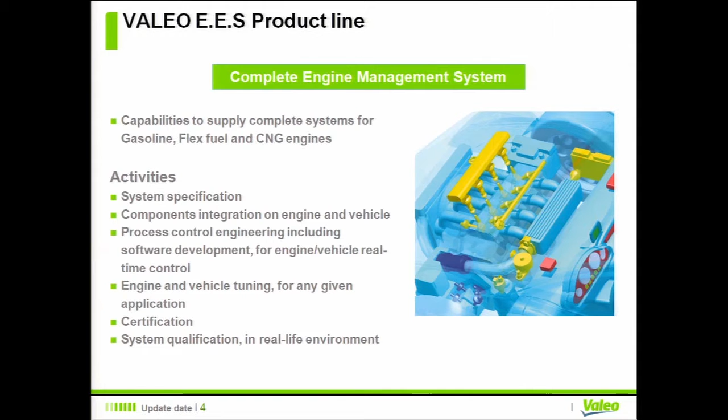Then I will describe the development process by itself. And as a conclusion, I will talk about benefits, issues, and improvements that we still have to do. So development context. So first, Valeo engine management system. We developed full engine management system, but also components and also software components, previously as standard software and now as AUTOSAR components. So today we'll for sure focus on software activities development, including control law development and implementation.

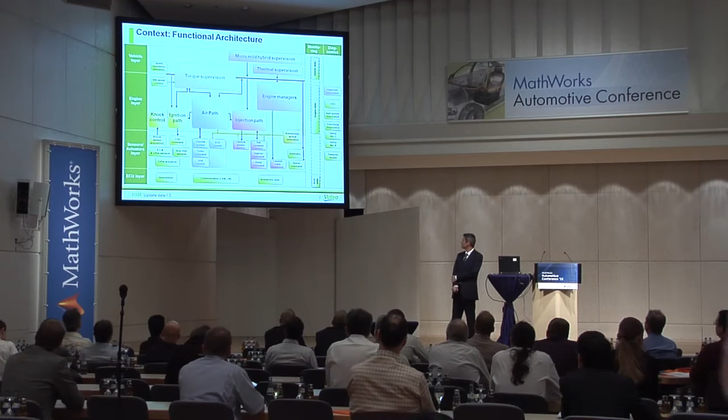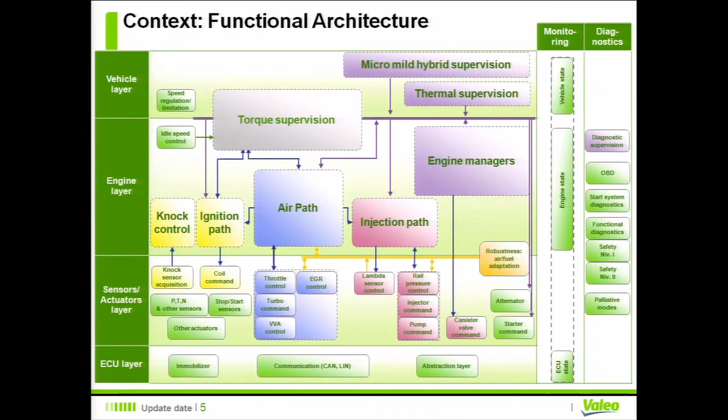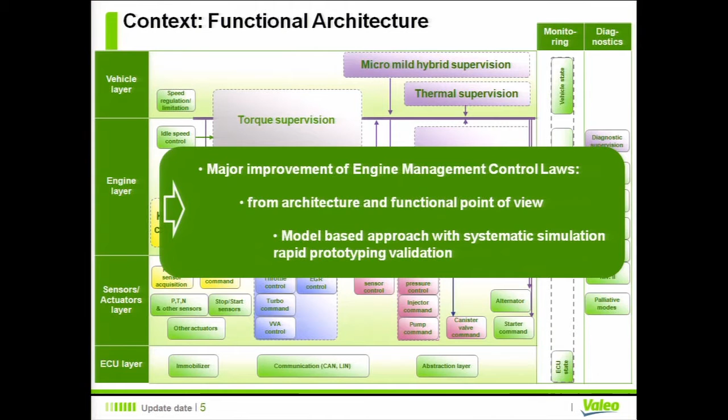So the first element was a main improvement done on our functional architecture system. And due to functional requirements such as hybridation, downsizing, and so on, we had many architectural, functional, and also performance improvements to do on our system. We are used to work with model-based since many years, like everybody for sure. And in this context, we also introduced latest model-based processes. I mean, we introduced systematic simulation. We used to do simulation like everybody, but during this improvement, systematic simulation was done on all our systems. And rapid prototyping was used as validation of new functions. Okay.

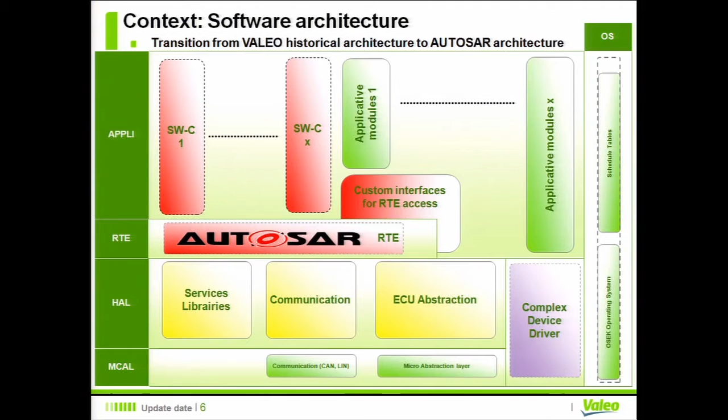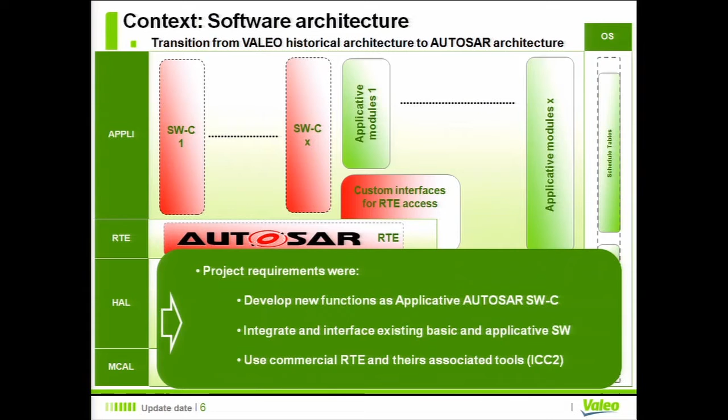The second point is the AUTOSAR context. We had to develop those new functionalities as applicative software components, just because it was a customer requirement. And due to these constraints, it was very difficult for us to reuse existing software, so we had to start from scratch, and to integrate those new software components in an existing software, so mixing old architecture with AUTOSAR architecture. The last constraint that we had was an organizational request who wanted to be able to switch from AUTOSAR architecture to standard architecture. And due to all those constraints, we chose to start with automatic generation of code at this time.

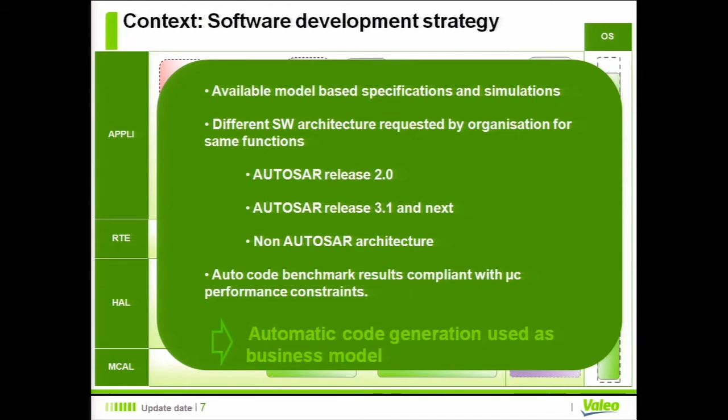Okay. So the development process by itself, I will first talk about functional design. Models that are developed are used during simulation, during co-simulation, and are then used with rapid prototyping to be validated on test benches. Functional requirements are introduced in the models and in the test environment, oracles and stimuli. And functional requirements are expressed as signal builder behaviors, and they are delivered as a standard element of specification.

So with this process, algorithms are robust due to validation, and all what is requested by software teams is delivered at the output of this step. I mean, we've got the model okay for the automatic generation of code, but we have also simulation and stimuli sets that we will use during all the process to test non-regression of the implementation.

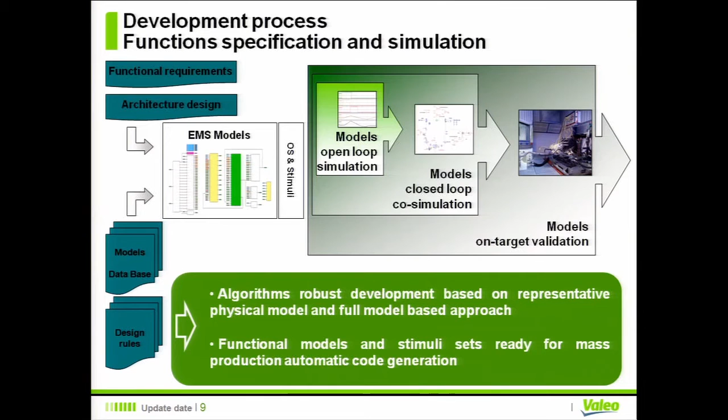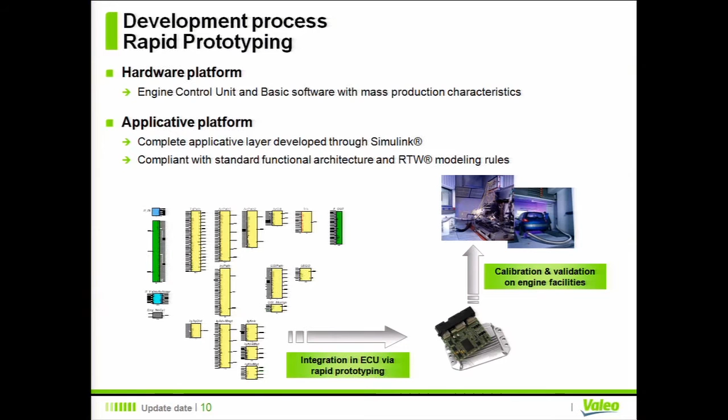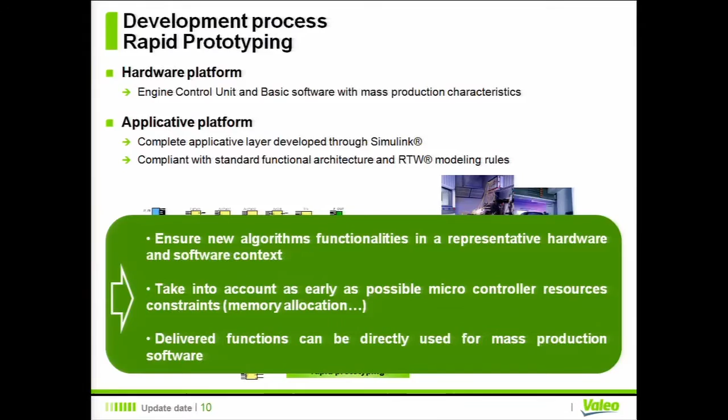So for the rapid prototyping, one important point is that we use a rapid prototyping platform based on the final microcontroller. It embeds more flash and more RAM, but the CPU is the same and the hardware definition is the same. So we've got something very representative of the final ECU. And the designer also used Real-Time Workshop to embed their new strategy in rapid prototyping. So at the end of this step, we've got information about microcontroller resources consumption. And we know also that models can be coded with Real-Time Workshop.

So for the software team, the output of the design phase is what we were expecting for many years. I mean, we've got models that are executable, and we also have expected behavior description provided by the simulation. As a complement, we also have information on microcontroller resources consumption.

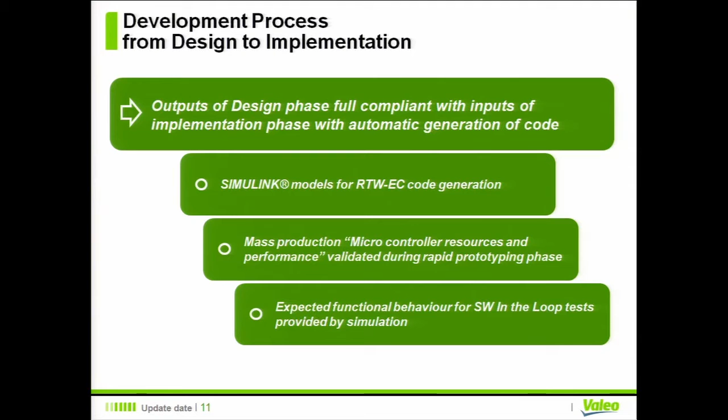Okay, so at this point, we can start with a real implementation process. The implementation process is divided in 4 steps. The first one is the one we call architecture. We've got to make some reworks on the design models for many reasons.

We've got to introduce specific software requirements in the models. We've got to introduce our software optimized libraries in the model. What else? We've got to introduce also basic software APIs in the models, and so on.

So, previously to this first phase, to this first step, one software control is done on the model to be sure that the implementation step could be launched in a good way. And for this, we make complexity analysis. So part of the analysis is done by tools to count blocks, IOs, and so on, and also manual human analysis to check for function call organization mostly.

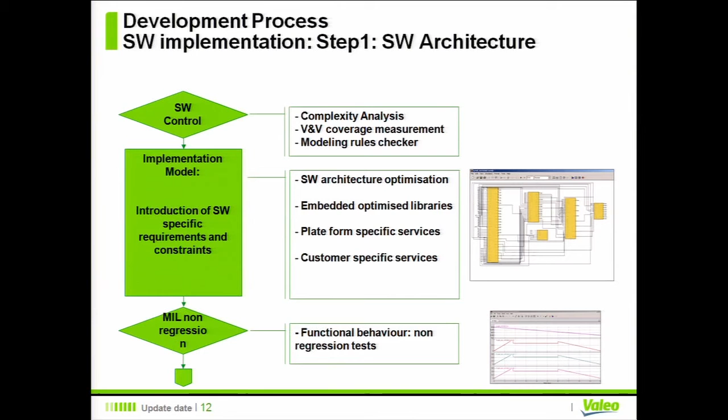And due to the fact that we make some reworks on the model, we've got a first non-regression test at the end of this step to be sure that the model still has the same behavior as the initial one. Okay.

The next step is a real software implementation step. At this step, we introduce all software features like data typing, memory mapping. We manage data type propagation, saturation, overflows, and so on. And at this step, we also introduce AUTOSAR features in the model. All of this activity is done with Simulink and Real-Time Workshop Embedded Coder.

For AUTOSAR workflow, when the AUTOSAR target is selected for Real-Time Workshop Embedded Coder, we've got an interface to describe all the AUTOSAR features for inputs, outputs, and runnables. Okay.

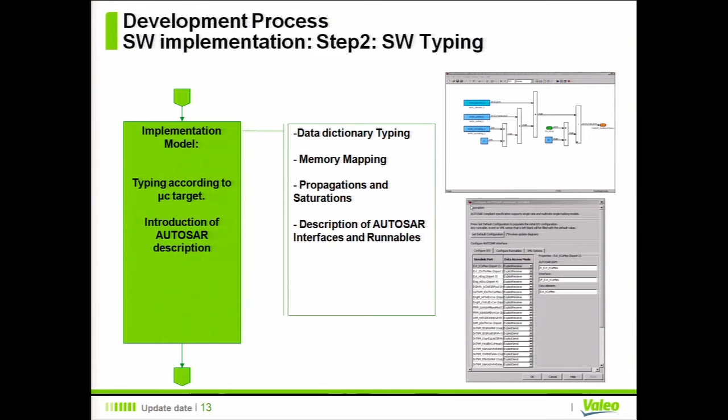At the end of this definition, we run a second time our model checker, but we use much more restrictive rules to check implementation and software rules. I mean, this checker allows us to check for saturation and so on. It's, from my point of view, quite impossible to check a model and model configuration in a human way. There are too many checks to do, too much information to be validated.

So once the model is checked and all the rules are validated or justified if they are not respected, we generate the embedded code as well as the S-function by using Embedded Coder. And the software model and the software code are then tested using SIL process.

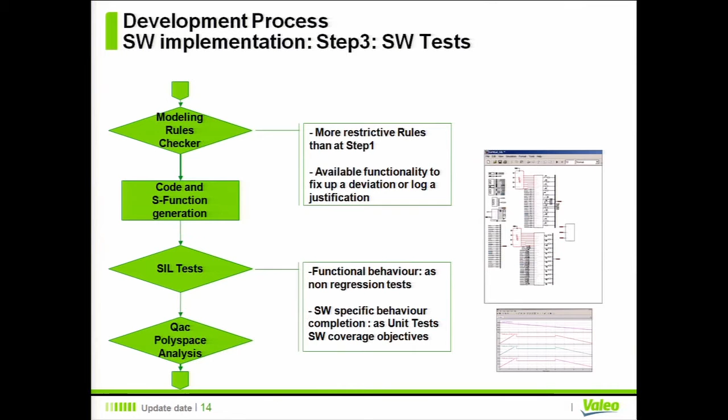Okay. As a complement, we run QAC and Polyspace analysis, mostly to check for overflow management and runtime errors. The last step is software delivery, and still with Embedded Coder, we are able to deliver a consistent package, including the C code, the A2L files, and also the ARXML files.

We also reuse one more time the simulation to extract integration information to build our integration test plans. We use the simulation one more time to describe expected values for a given input set.

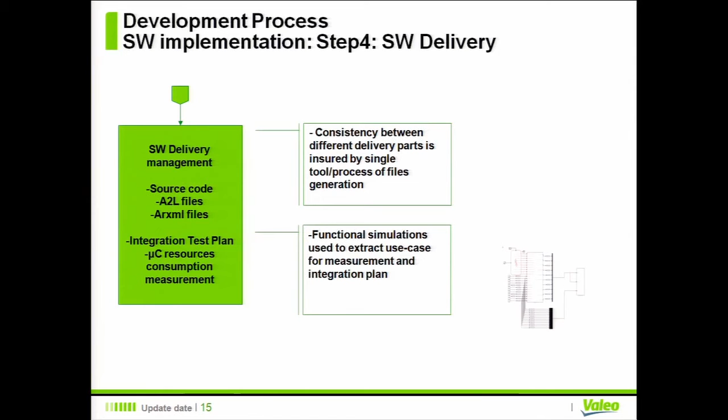So, one also very important point is that we wanted to deploy these new coding processes, but we wanted to keep all the support processes that we had for project management, for requirement management, issue management, configuration management. It was very important for us to keep all those tools and processes as we had before.

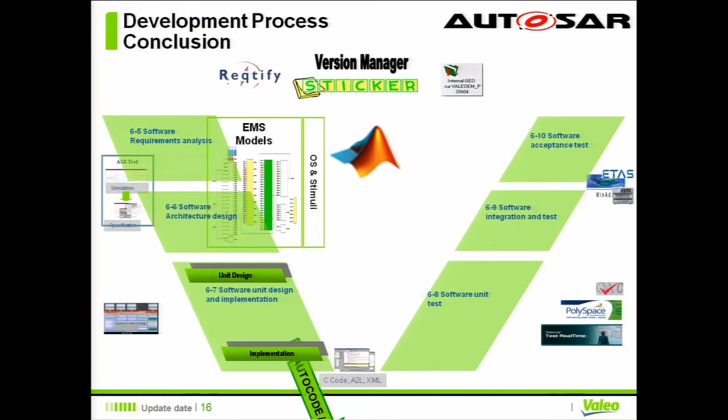And so we just started with the models and the simulation to generate the code and to make verification using MIL, to make verification using SIL, and to reuse one more time simulation to build our integration test plans.

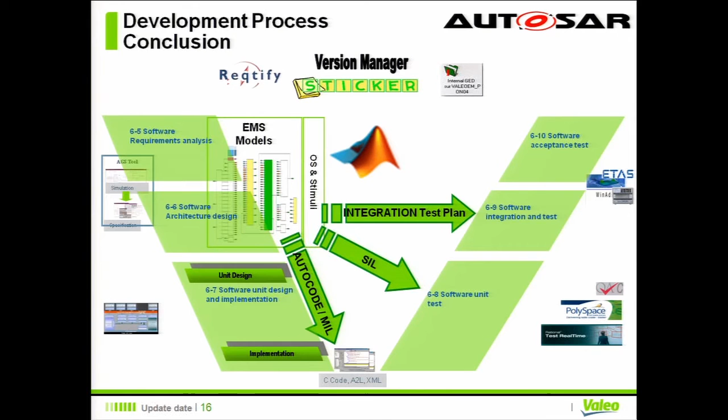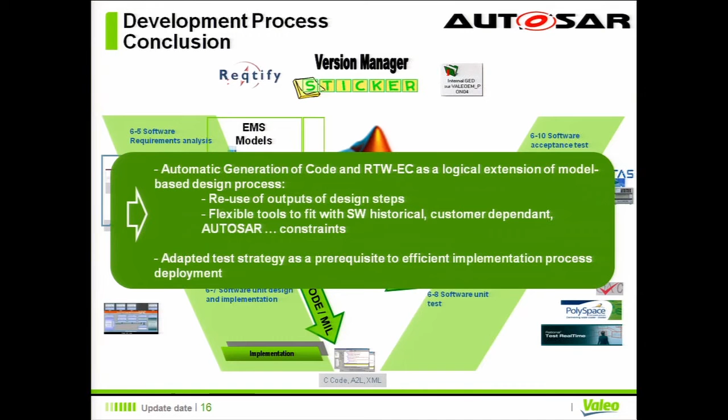So for us, automatic generation of code must be a logical extension of model-based design. We reuse all the outputs of the functional design phase, and we only had to adapt our test strategy to be sure that there was no regression on the models and on the generated C code.

As a conclusion, I will give you some key data. So we have developed about 20 applicative software components. The integrator project has integrated those 20 software components, but also 20 other ones coming from other suppliers.

We also introduced lean basic software as an AUTOSAR basic software. We used commercial RTE tools and authoring tools to integrate the components. And we had to develop many tools to interface all software with RTE, to be able to read information on RTE or to write information on RTE on our existing software.

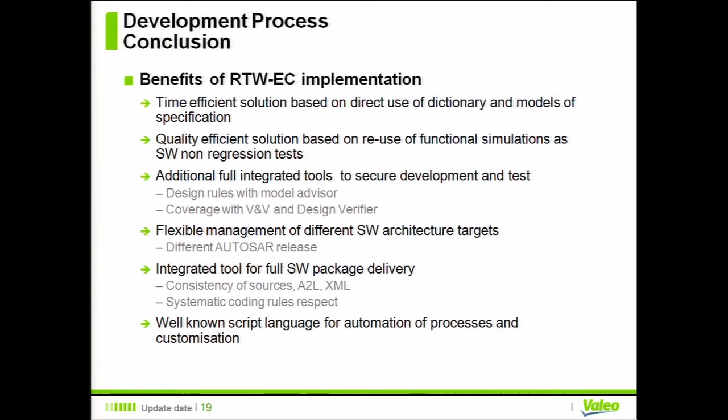And last, the very important point is to have a consistent package for our deliveries. And what was also very interesting is that Simulink uses a very well-known script language that offers the opportunity to make some customization and automation in our process.

We made those developments with the 2008B release, and there was some missing functionality for AUTOSAR. For instance, the AUTOSAR runnables at the beginning must be at the top level of the models, and for us it was quite a problem because there were no constraints for designers, and we had to ask MathWorks to help us with a pilot support package to be able to manage our existing models and work around these constraints.

Second one was inter-runnable variables produced by multiple runnables. The merge function was not available, and we also had to fix this point with a pilot support package.

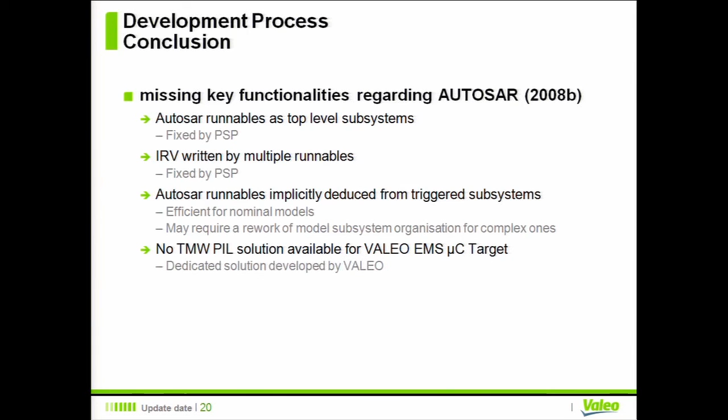One feature of Embedded Coder with the AUTOSAR target is that it is able to deduce AUTOSAR runnables from function call subsystems in the model. So I would say for nominal models, it's a very, very efficient way because we have no definition to do. For complex models, it has been one constraint, and we had to make one big rework to remap, in fact, the subsystems according to function calls. Last point is that we had no processor-in-the-loop solution with our microcontroller with the Embedded Coder solution.

And so to conclude, I will insist on what I consider to be the major points to be able to start with automatic generation of code. First point is for sure to have some standard block libraries and to share those libraries between designers and software teams. It's something very important. Second point is to have a model checker, because I consider it's not possible to have a human exhaustive check of all the configuration of all the blocks and so on.

And the last point is that we also need simulation with full coverage of models. It's very important to be sure that after the implementation step, the behavior is still the same. So for this, we use coverage measurement tools, and we have processes to increase the coverage when it's not full. And some software tests cannot be done on models, so we also have to make specific tests on generated code. And for this step, we use mostly Polyspace, which covers all the points that are not covered in the model.